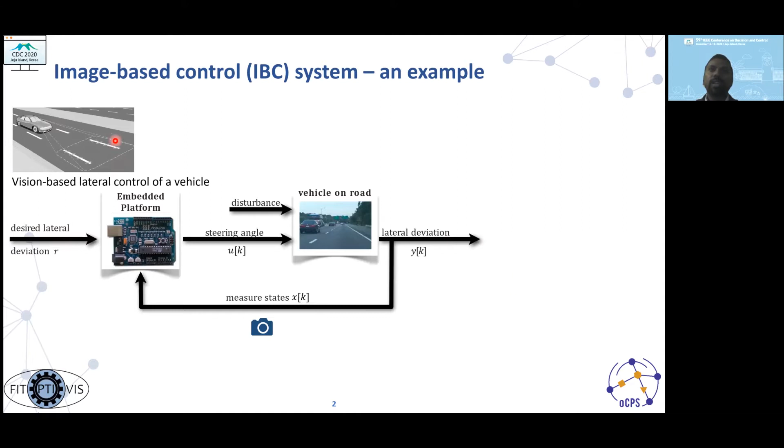First, I will talk about a vision-based lateral control example. The idea here is for the control system to steer the car autonomously to stay within a lane. The camera acts as a sensor to measure some of the system states. The steering angle is the control input and the output is the lateral deviation. The tasks executed on this embedded platform are the sensing and processing task S, the control computation task C, and the actuation task A.

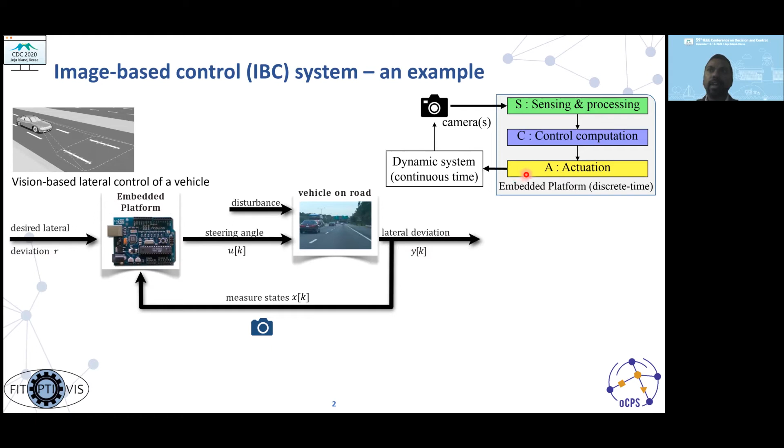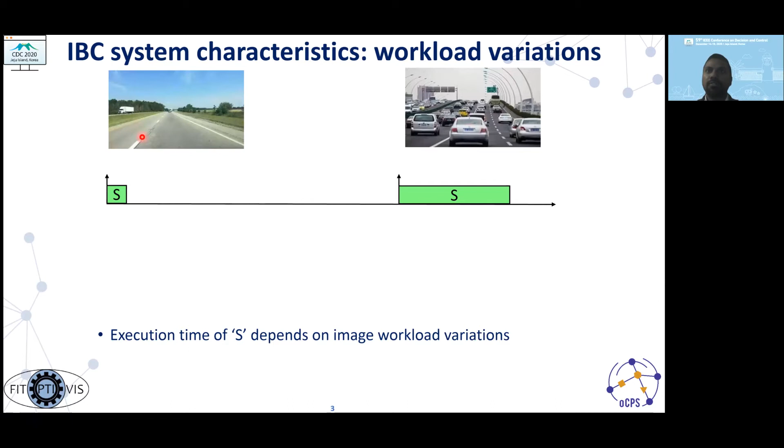What this means is that the execution time of S depends on these image workload variations. So for this image, the time is much shorter compared to this image. The next thing we notice is that this time is relatively long and is also highly variable. This variable workload can be characterized as a probability distribution where the average case most probably tends towards the best case.

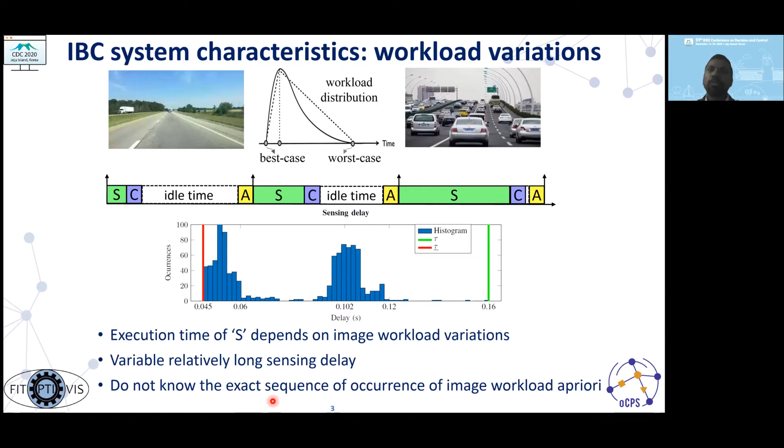The other aspect is that you also do not know the exact sequence of occurrence of these image workload variations a priori. So for a typical control design, what we normally do is design for the worst case workload. However, you notice that this worst case rarely occurs, and because of that, you end up with a lot of unnecessary idle time in your processor utilization and also some dropped frames because you do not have enough resource to process these frames.

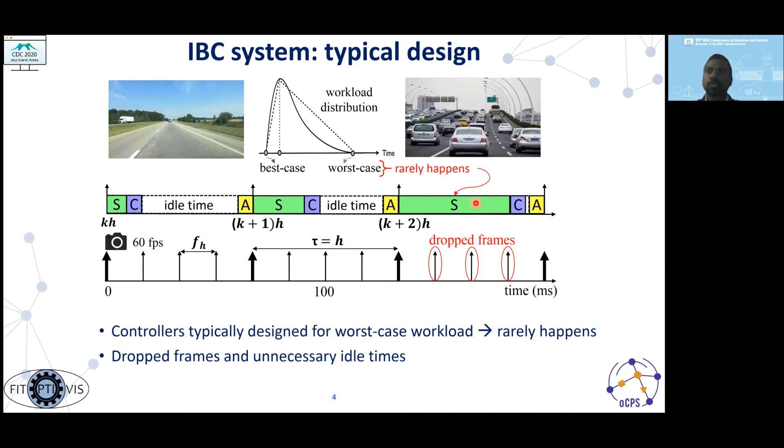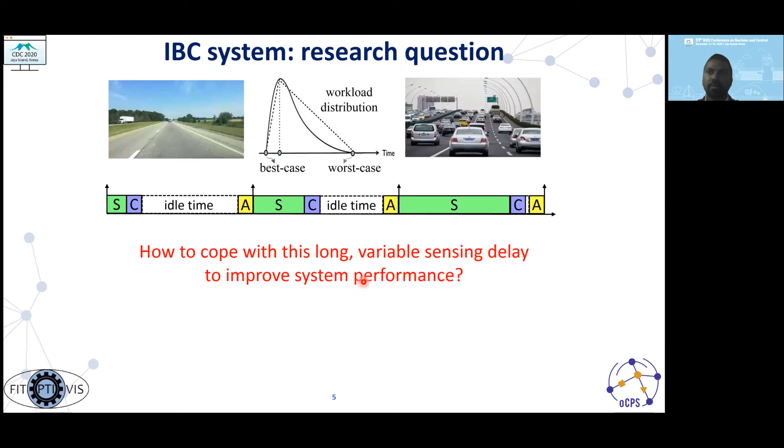So the main research question we try to address is how to cope with this long variable sensing delay to improve system performance. One way to do it is by considering multiprocessors and by using a pipelined implementation where you reduce the sampling period. A pipeline implementation works like this.

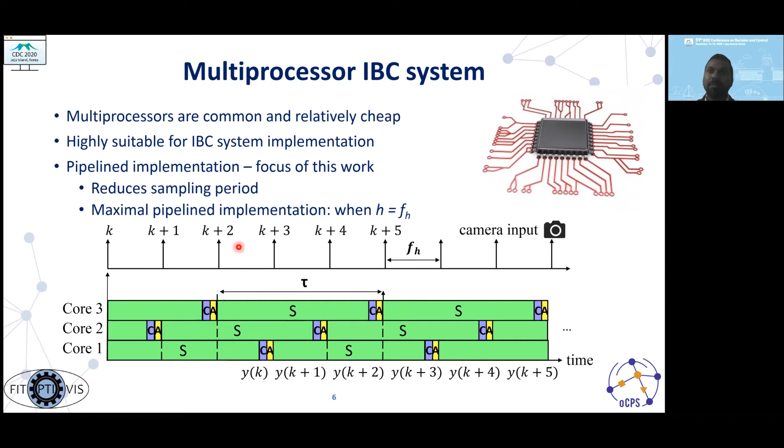And we say that you have a maximal pipeline implementation when your sampling period h is equal to fh. That is, all the frames are processed without dropping any frames.

However, there are a lot of practical challenges in multiprocessor IBC system implementations. Another challenge is the platform constraint, where, for example, you do not know the number of available processing cores. You're basically limited by it. If you have less cores, or only one core, you cannot actually pipeline.

The next challenge to consider is the system nonlinearities. For example, the velocity of the car could be varying, which might result in a nonlinear system. Another challenge is that there could be constraints on system variables. For example, the maximum steering angle is constrained to plus or minus 25 degrees.

You could also have interframe dependencies. These capture the data or algorithmic dependencies between two consecutive frame processing. For example, if you have an interframe dependence time fd which is greater than fh, what this fd tells is that after fd, there is some data that becomes available, which is needed before you can start processing the next frame.

And because of this, you might have a longer h. For instance, you could have actually had h equal to fh, but because of fd, you need to have h equal to 2fh here.

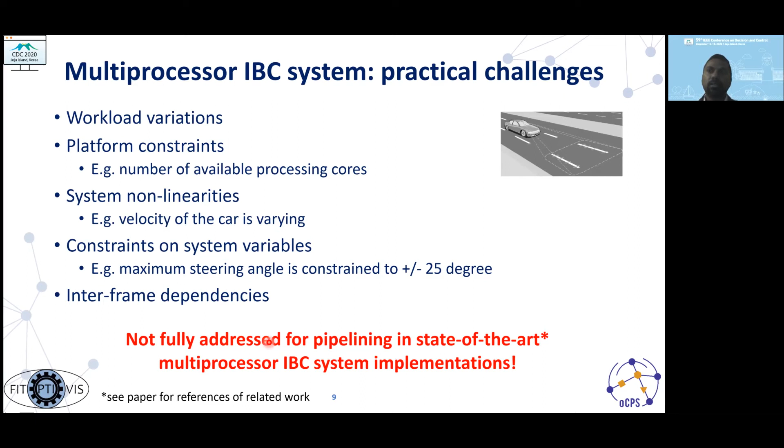So what we notice is that these practical challenges are not fully addressed for pipelining in state-of-the-art multiprocessor IBC system implementations. So as our contribution in this work, we propose an adaptive predictive control formulation based on linear parameter varying input-output models, considering these practical challenges, and we answer the question of how to optimize quality of control for a practical real-life IBC system. We also give a brief tutorial overview of how to handle delay while using input-output models for MPC.

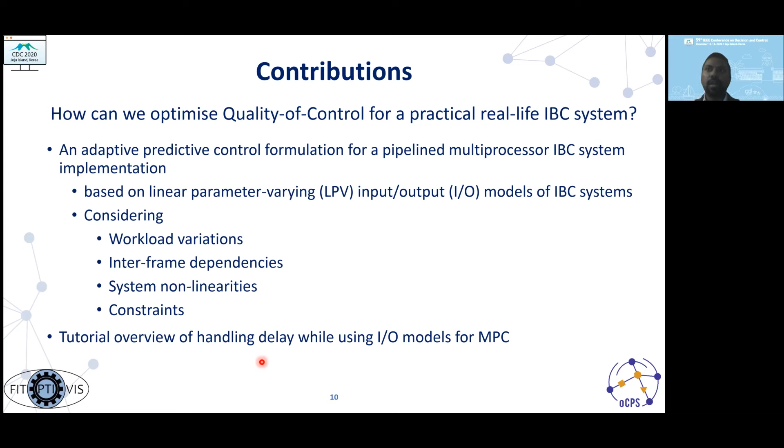So the first question that pops up is: is it really feasible to use MPC in resource-constrained systems like the automotive case?

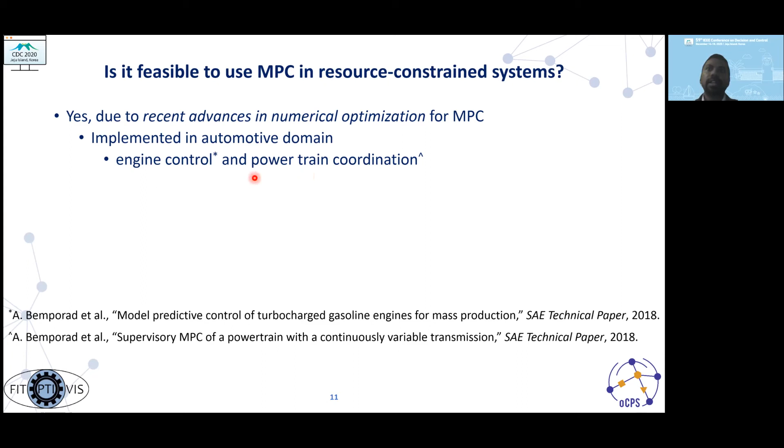The answer is yes, and it's mainly due to recent advances in numerical optimization for MPC. MPC has already been implemented in engine control and powertrain coordination systems in the automotive domain, and they are already in mass production. The next question is, what about adaptive MPC?

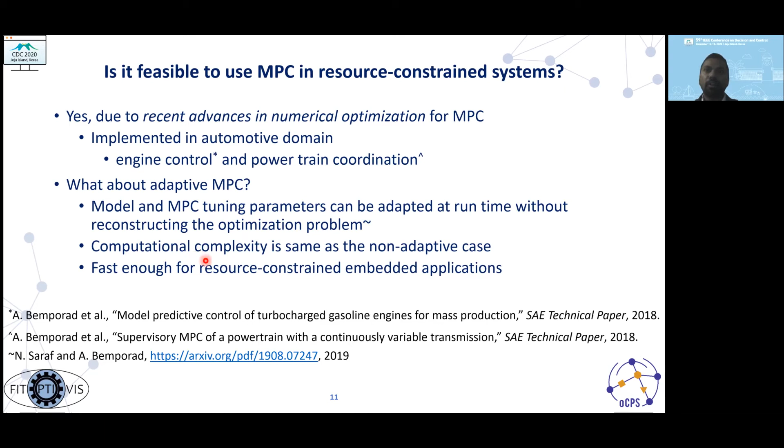A recent work has shown that the model and MPC tuning parameters can be adapted at runtime without reconstructing the optimization problem. Also, the computational complexity is the same as the non-adaptive case. It is also shown that an adaptive MPC is fast enough for resource-constrained embedded applications.

In our formulation, we first consider interframe dependencies and the platform constraints, for example, the available number of processing cores, to compute H, which is the minimum sampling period you could have for your system. So using the computed h and the delays, also using the input-output system model, we obtain an adaptive predictive control system.

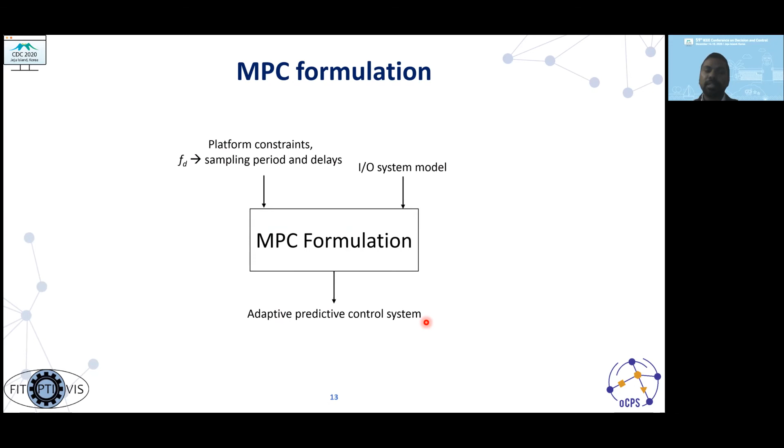Regarding the optimization problem formulation, our cost function has two terms: one penalizes the output tracking error, the other term penalizes the deviation of inputs from steady state targets. So we formulate the QP problem as shown here. You could refer to the paper for more details.

The main point to note here is that we actually keep track of a stack of known past sequence of outputs and inputs, and you can adapt the problem at every time step.

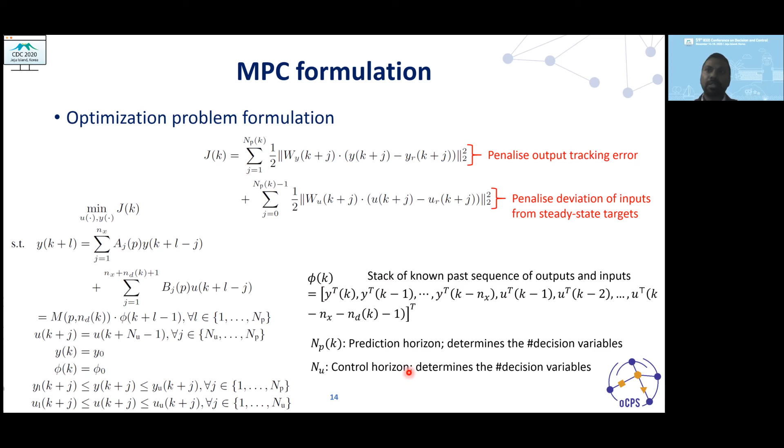A bit more detail. This is the input-output model we consider, and this can be derived from state space equations, and representation of this model in an ARX form is shown here. How we incorporate delay is by setting the coefficient bj to be 0 for the delay terms.

For example, if the delay is represented as ndh plus tau dash, then we set for j equal to 1 to nd, bj to be 0. By doing this, the size of the MPC problem does not change, and also the tuning parameters and model parameters can all be changed at runtime.

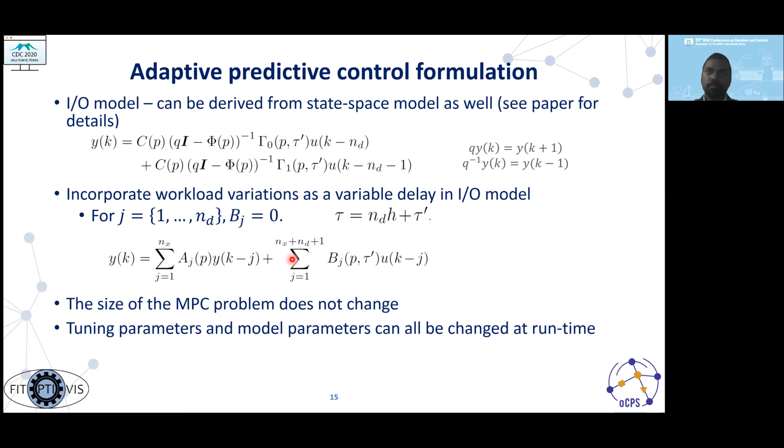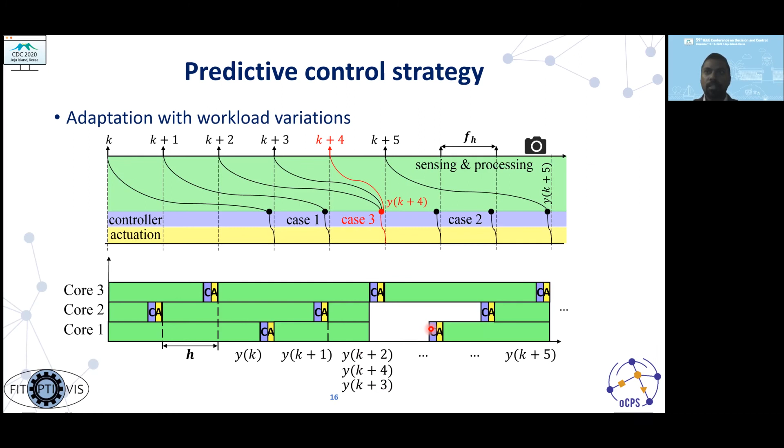So what this means is that at some point you receive all this latest information at the same point, and then you can do a control computation and actuation using all this information. There could be other points, other control compute tasks, where you do not have any new information available, and so on. We represent it as case 1, case 2, and case 3.

Case 1 here is that the sensing delay is same as the previous step. So you keep the ND constant and the stack is updated as normal.

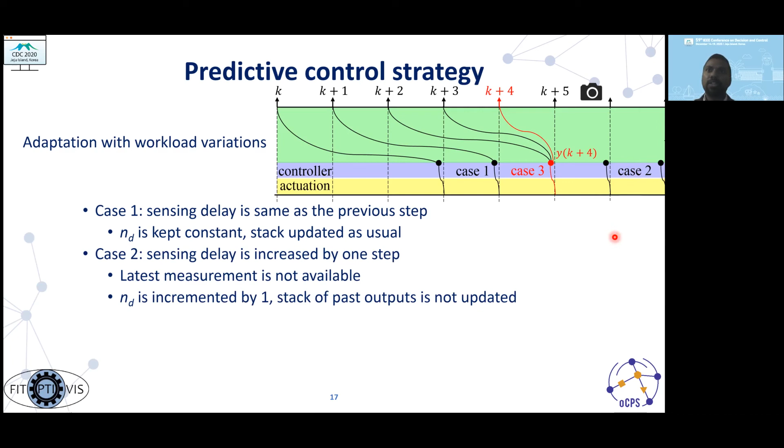We have case 2 where the sensing delay is increased by 1 step, which means you do not have any new measurements available. So you increase the ND by 1 and you update only the inputs and you do not update the past outputs. Case 3 is that the sensing delay is reduced by 1 or more steps.

That means all your latest and past measurements are available. So you reduce ND accordingly, and then the stack is updated iteratively with the available measurements.

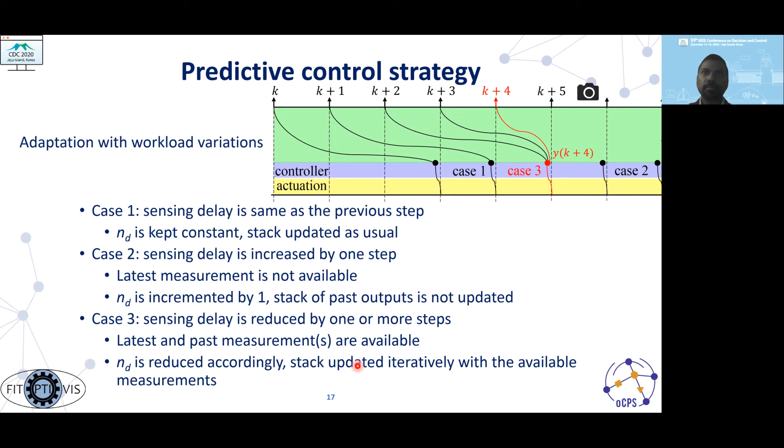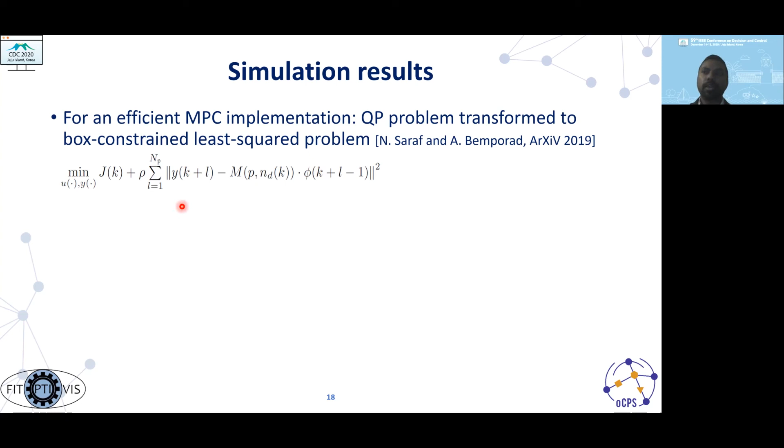For the simulation results, for an efficient MPC implementation, we need to actually transform the QP problem to a box constraint least square problem. The details we can find in the paper. And to evaluate our controller, we use these settings. Basically, these represent the challenges.

We show that the MPC with variable delay, that is, which considers the workload variations, performs much better than the MPC with the worst case delay.

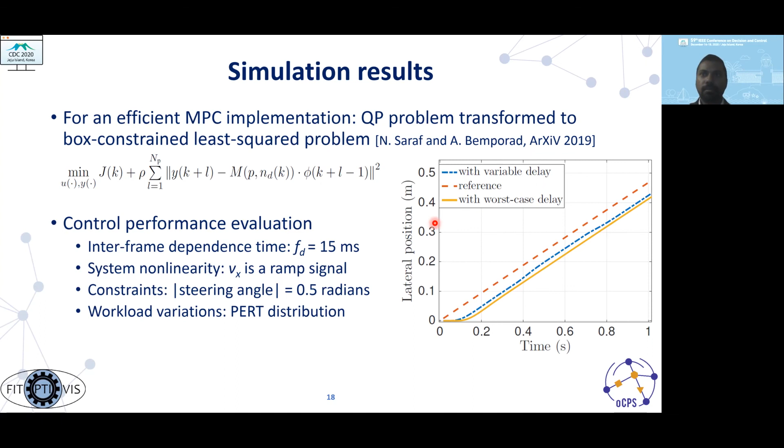We also compare our approach with state-of-the-art MPC, state-of-the-art multiprocessor IBC implementations. It is true that MPC is actually relatively compute intensive. If you compare to LQR-based control approaches, we see that the worst case control computation time is 15 times greater for the MPC, but it's still only 6 milliseconds for our case, assuming a 50 megahertz processor.

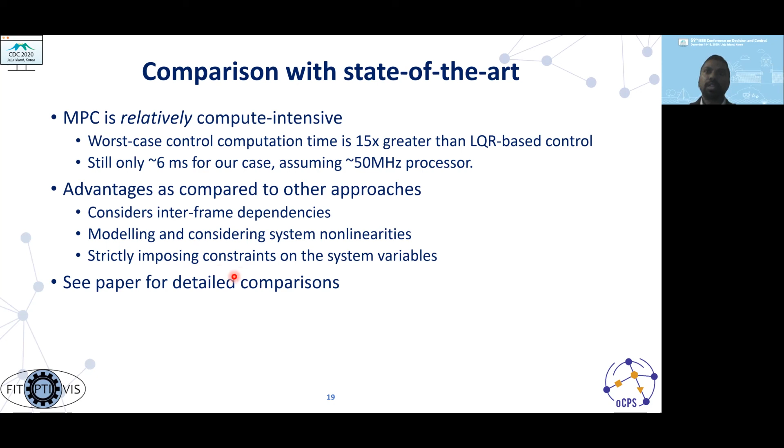The sensing delay is actually much higher than this, so we could still use MPC for our application. Our approach has a lot of advantages compared to state-of-the-art approaches because we consider interframe dependencies, we could model and consider system nonlinearities, and we also strictly impose constraints on the system variables.